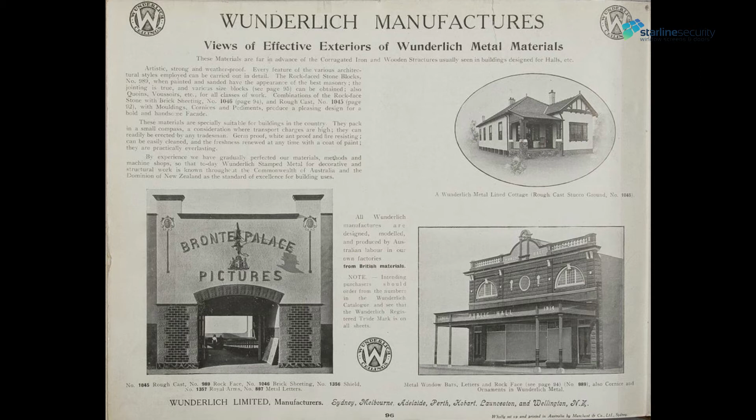Wunderlich ceased manufacture of aluminium windows and doors in Australia, sometime late 20th century - if anyone knows when, please comment. Like many of the original aluminium window and door designs, they did not consider security doors at all, because the modern security door we sell today had yet to be invented.

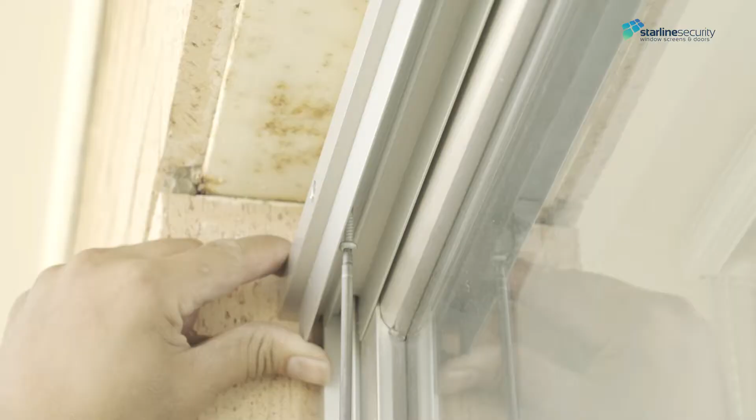This means that installing a security door to one of these older doors requires custom tracks and channels. We need to install a head track and side jamb where one doesn't exist now. For the head and receiver side, a 19x19 box build-out is the best option.

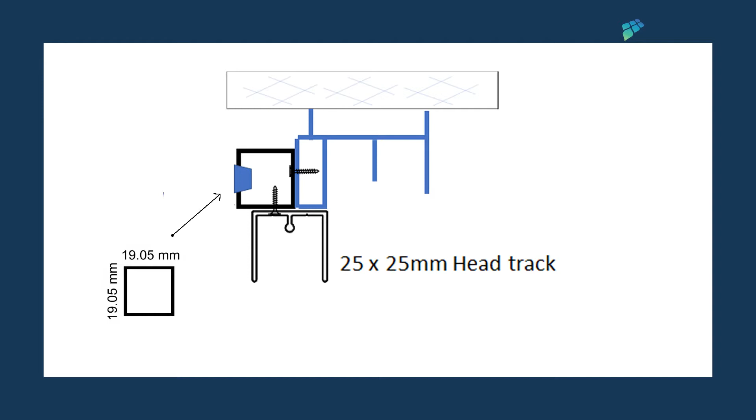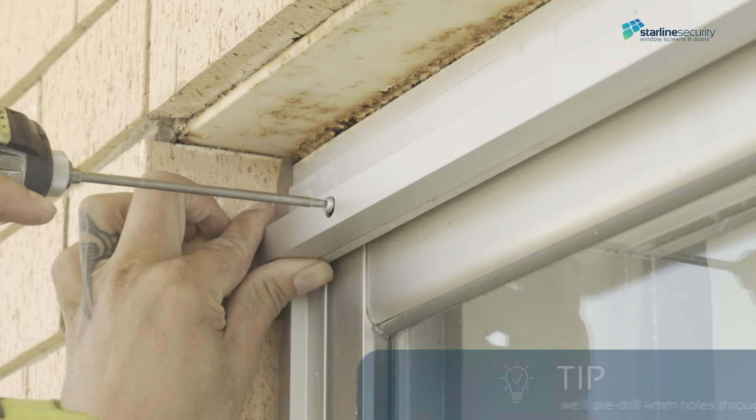Measuring from the edges of the brick for the head is 2,410mm. When we install this, we'll pre-drill 4mm holes through and a 10mm to the face to suit our 10mm hole cover caps.

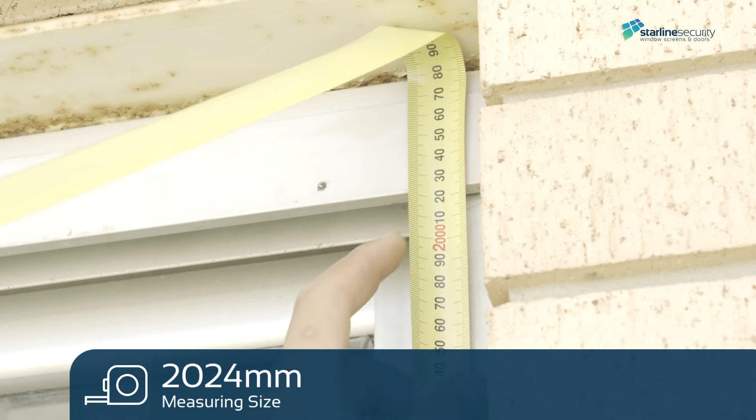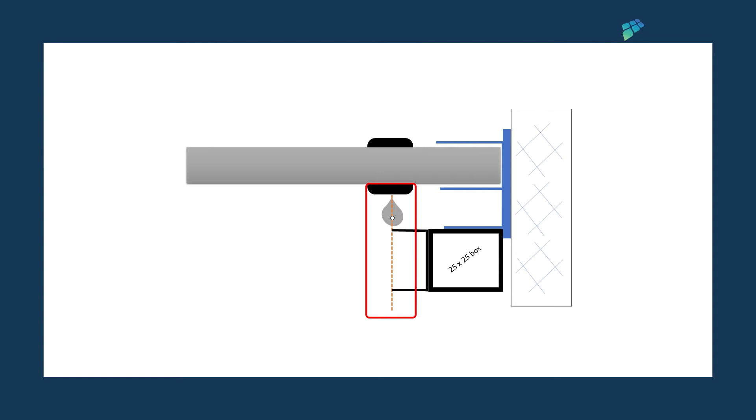Measuring for the receiver side 19x19 build-out is done from the sill to the bottom edge of the head. This measurement is 2,024mm. A 25x25 receiver side box may have lined up better with the head build-out, but it pushes the lock receiver channel over another 6mm. This may not seem much, but it is when someone is trying to access the glass door lock from outside.

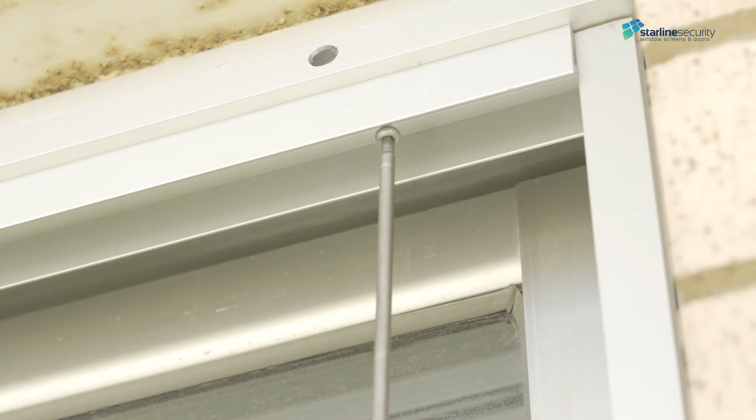Measure and install the head track. Measure the 25x25 sliding door top channel to fit under the 19x19 box build-out. Measurement is 2,370mm. Install this so the sliding door will be close, but not touching the back interlock.

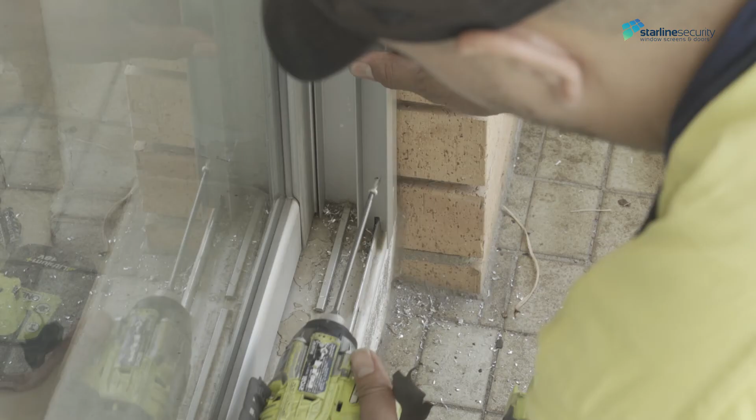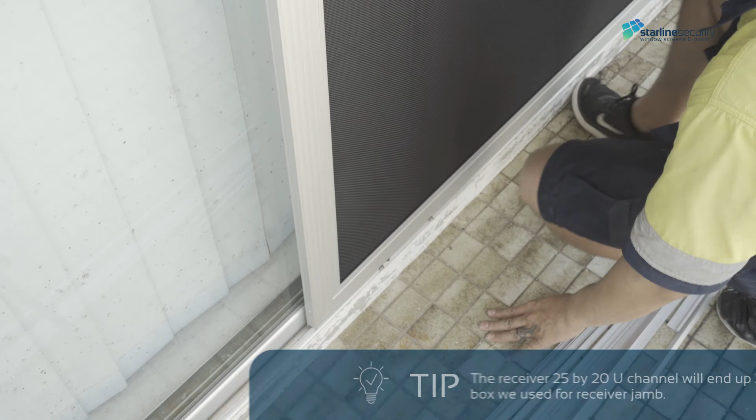Measure and install the receiver U-channel, and install it to the 19x19 box build-out. Make sure your screw positions are evenly spaced, but not where the sliding door lock strikers are. Feel free to lift the door into the tracks and slide it across to make sure it's aligning with the receiver U-channel perfectly. This 25x20 also needs a cutout in the center at the bottom.

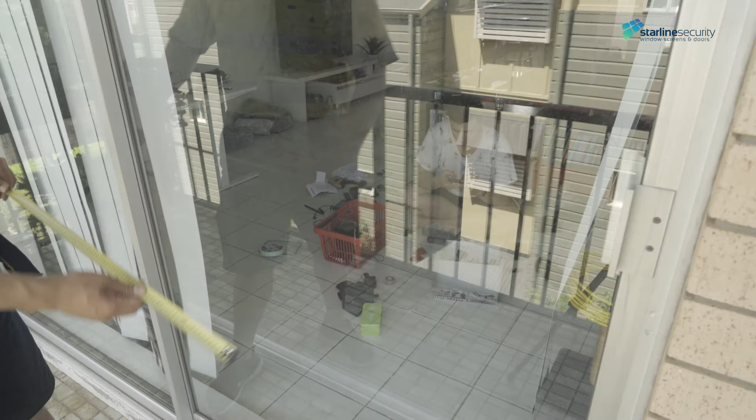For the door measurements, measure the width from the receiver channel to the back edge of the glass door mullion. This measurement is 1,192mm. There are a number of back interlocks available in our portal, but in this case, a flat interlock works best. So we'll add 10mm to our measured size for a security door manufacturing size of 1,202mm.

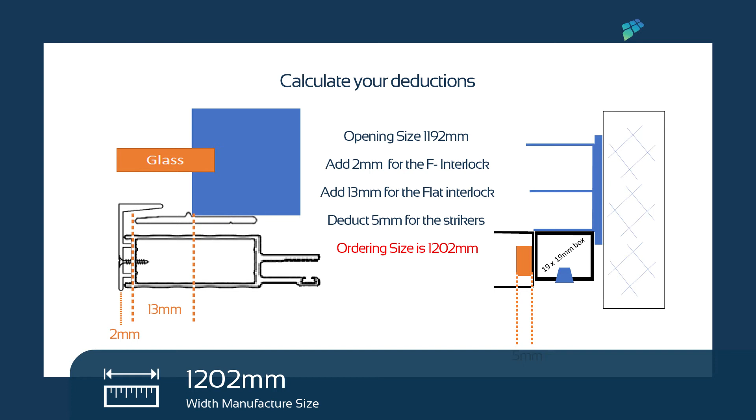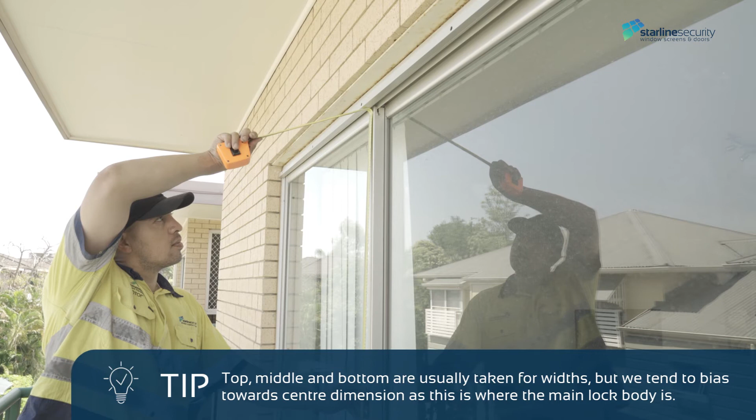Measure the sliding door drop from the bottom pip track to the bottom edge of the 19x19 head build-out you installed. If you've installed this build-out properly, the drop dimension should be equal all along the track. Our measurement is 2,010mm all the way along.

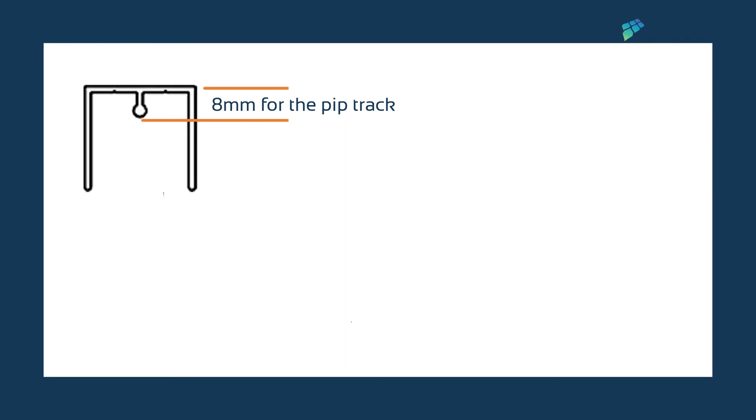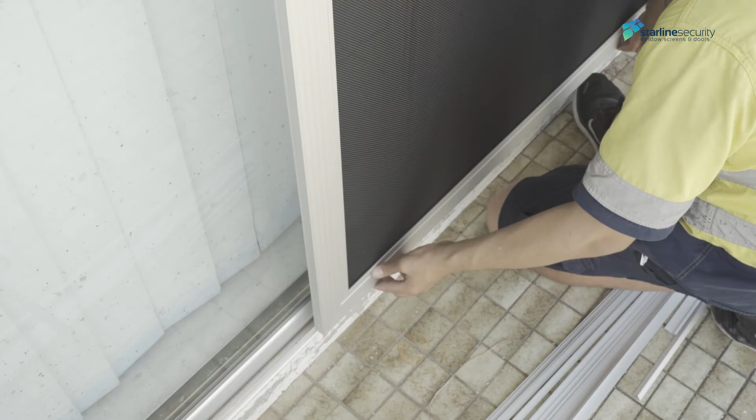Good job. Deduct 8mm for the pip track in the 25x25 U-channel, 12mm for the door's top and bottom wheels, and another 2mm for any out of square that is most likely going to appear as soon as we sit the door on the tracks. The drop manufacture size will be 1,988mm. Note, don't forget to note the lock side and lock height, making the security door lock above the glass door lock.

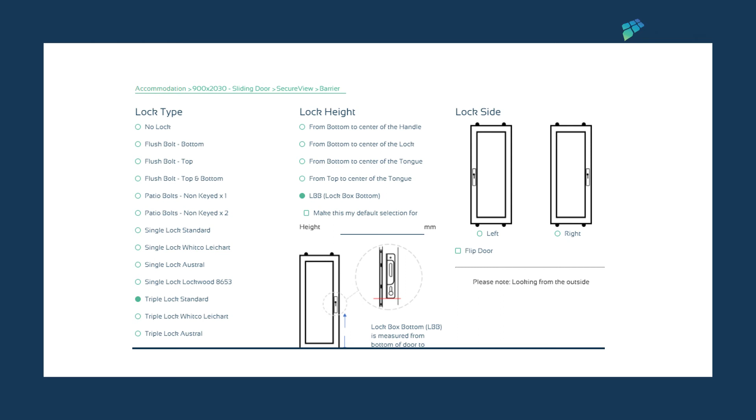Install the door, attaching the top guides to the top of the sliding door. Lift the door into place and adjust the wheels to square the door. Attach strikers to the lock and engage. Peel the tape off the strikers and close the door. Fix off the strikers in the receiver jamb.

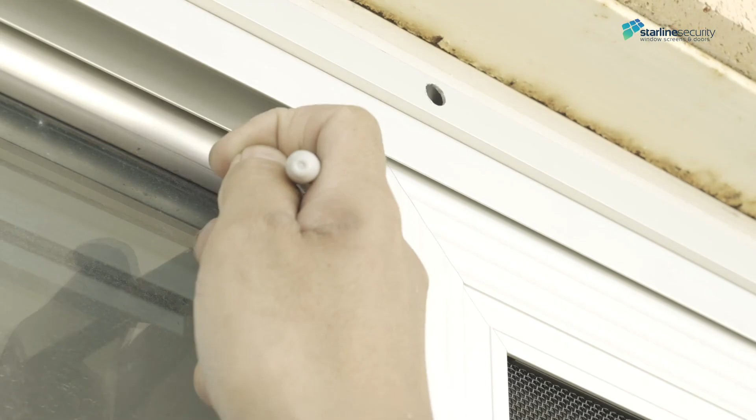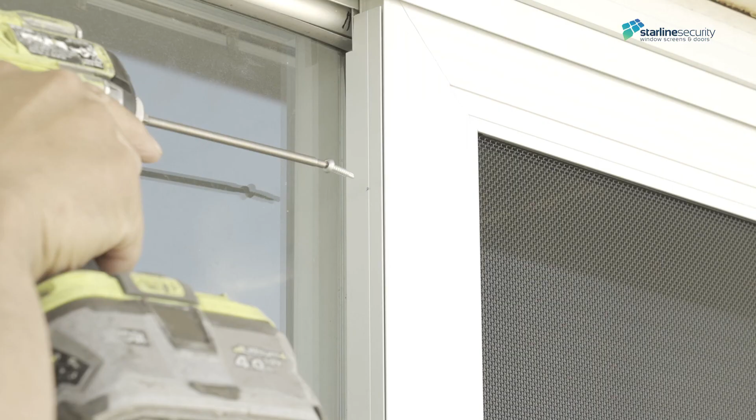With the door in a closed position, mark the back edge of the door frame on the mullion and install the flat interlock with pop rivets. Reinstall the door and cut a sliding door F interlock to size before fixing it to the back edge of the security door. Measure bug strip, cut to size and attach to the bottom in a closed position.

There you go. Another Starline Security video.